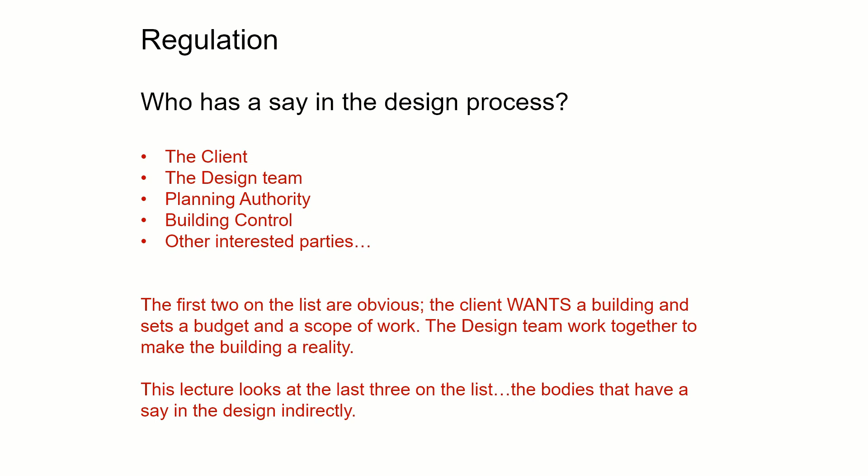So if we look first of all at planning permission, most people would have heard of planning permission, but it sometimes can be confusing to understand exactly what it is they are concerned with or what they have control over.

Most building projects in the UK go through a process of applying for and potentially or hopefully gaining planning permission. Planning permission can be thought of as a formal granting of permission to build by the local authority after they've considered a number of key factors.

First and foremost, they're going to look at what the building is used for. If you put an application in for a house, or a nightclub, or a pig farm, those types of buildings and those uses of buildings will be considered differently depending on where they are.

Planning are really looking for buildings to be fitted into certain categories to make sure that they don't become nuisance neighbours, that they're appropriate for the area to be developed in.

The planners have a number of tools at their disposal to check this. Buildings are classified by their use category, and buildings can be accepted or rejected based on whether that use category fits in with the land that the proposed development is going to be taking place on.

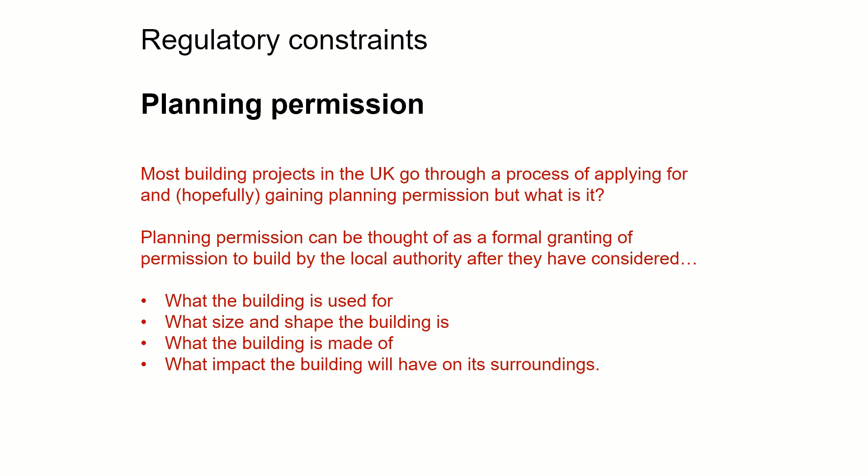The process of applying for planning usually requires you to have developed a design to a point where we can understand what it's going to be made of, how large it is, and its position within a site. So we would prepare a number of drawings, design statements, reports, and any other supporting documents required so that the planners could get a good idea of what the building is.

The local authority can then receive a planning application and they would consider it against their policies. They would look at it in terms of the design and the quality of the proposal, and they would also issue an invitation to neighbours and other interested parties surrounding the site to come and view and potentially comment on the proposals.

At the start of any planning application, there's usually a 3-week period where neighbours can fill out comments, what they call representations, to put their views forward. Usually these come up as objections, but they can be letters of support, very rarely.

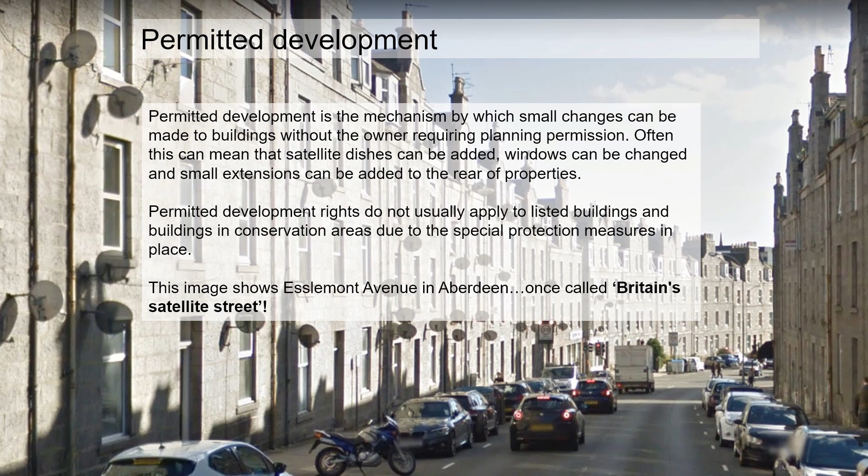It's really to stop the planners having to receive or deal with very, very small changes to buildings which aren't maybe seen as architecturally significant or historically significant. So things like adding satellite dishes, changing windows, small extensions to the rear of properties, changes to the roof, and repairs can usually be done to buildings that are not listed or in conservation areas without requiring planning permission. This is referred to as permitted development.

One of the additional characteristics that some buildings have is that they are listed, and you probably would have heard of listed buildings. These tend to be significant buildings which are judged to have special architectural or historic interest - special in inverted commas. It is debatable what is meant by special, but really they're looking for something which is of outstanding quality, or has uniqueness in some way, or has a historical interest.

That could be an attachment to a particular person, or an event, or a particular period in time. Listed buildings are preserved to help explain our culture and enrich our environment. They become part of our past, and they talk about a particular period of time, or events that happened.

Buildings are listed on a register maintained by Historic Environment Scotland, and you can view that register by going to their website. Buildings that are listed will be categorized into one of three subcategories - A, B, or C. These are effectively ways of listing buildings, but in reducing measures or reducing recognition of their importance.

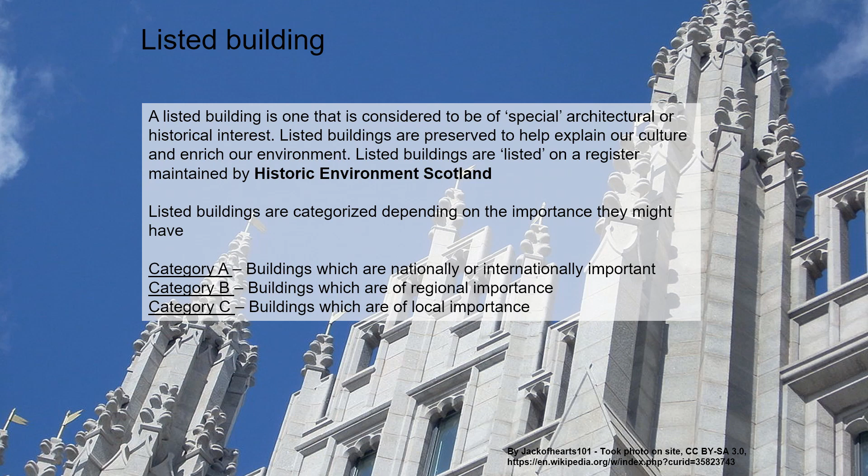There are over 600 conservation areas throughout Scotland. I think there are 8 in Aberdeen, and you can view the maps of conservation areas by usually going to that particular council and searching for maps. I'm not sure if there is a centralised database, but the councils definitely maintain these.

Conservation areas are crucial for the conservation of our environment. They allow an additional level of control so that changes can't easily be made to buildings, or can't be made under permitted development rights. The council may want to control things like changing windows, or changing fixtures and fittings to the front of buildings.

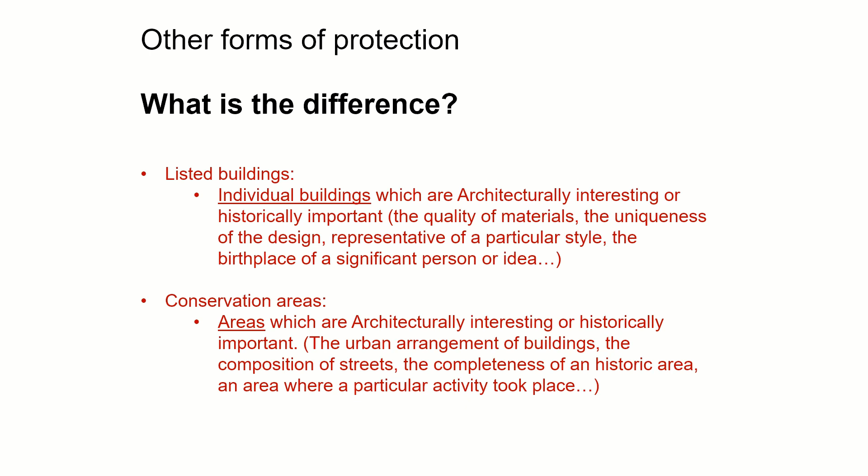So the planning system is really concerned with what a building is, what it looks like, what its function is, and how it would fit into its environment. It's not really a technical appraisal. In the UK and in Scotland, we consider technical appraisals separately from appearance and function.

Our technical system is building standards, sometimes referred to as building control or building warrant. Technically, the document that you get when you apply for and get granted permission to build is called the building warrant, and most councils would have a building control department that would deal with that. You would prepare a set of drawings, probably more technically in depth than planning drawings, but similar, covering a number of different aspects that the building standards officer would consider - looking at the structure of the building, whether it is safe, and whether it is protected from fire.

The design of the spaces within the building: have the designers considered accessibility, safety in stairs, access from one level within the building to another. They'd be looking for descriptions of the materials used within the construction of a wall to make sure that they are safe and certified by an appropriate body.

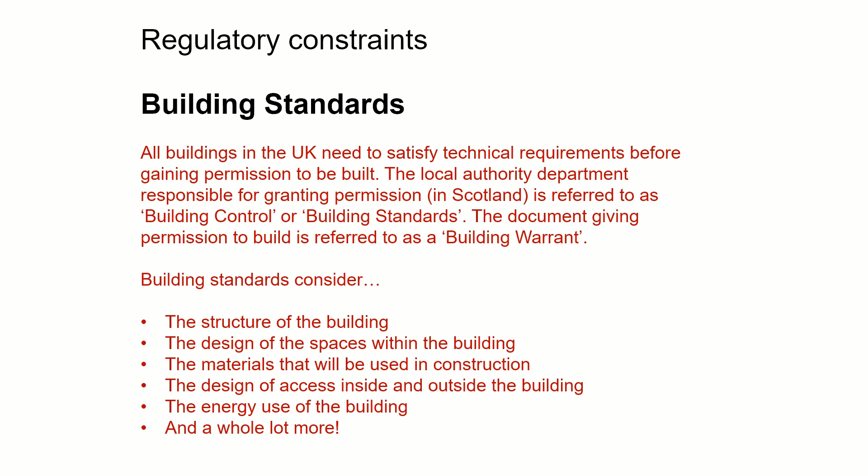So if we looked at an example of a plan that might be submitted for building warrant approval, we would probably start to split the information up into different levels. Rather than just having a plan that shows the arrangement of rooms, doors and windows, we would have a plan that might show an electrical layout, showing where smoke and heat detectors are located, where downlights and switches are located, and this would form part of the information they could deal with.

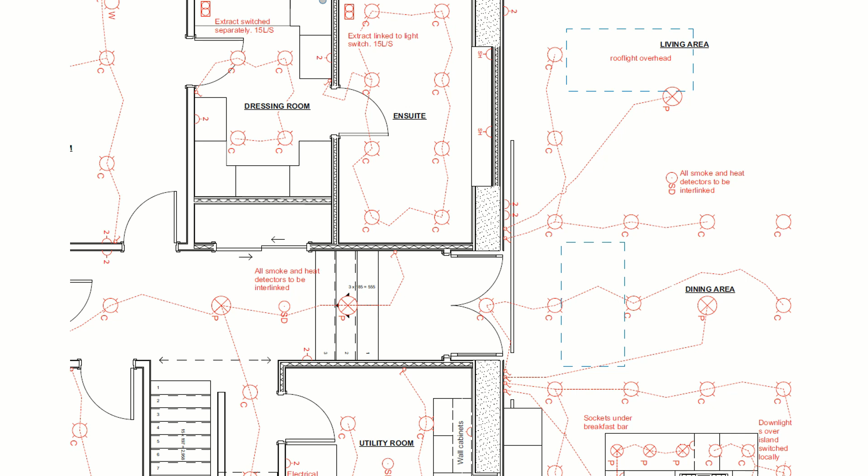Each different type of plan would have its own notes associated with it. For the general arrangement drawings, the ones that show the location of things, we would note things that maybe wouldn't be on planning drawings, such as widths marked on certain areas.

We would talk about the materials, add things like manoeuvring spaces for wheelchairs if they were included in a kitchen, and we would specify the rise and run of stairs, so that the amount of information on each drawing was relevant to its purpose.

Other drawings you might provide would be a drainage layout, a flooring material layout if possible, and we might also look at electrical layouts, as in the previous slide, possibly data, overhead structure, below ground drainage, all sorts of things.

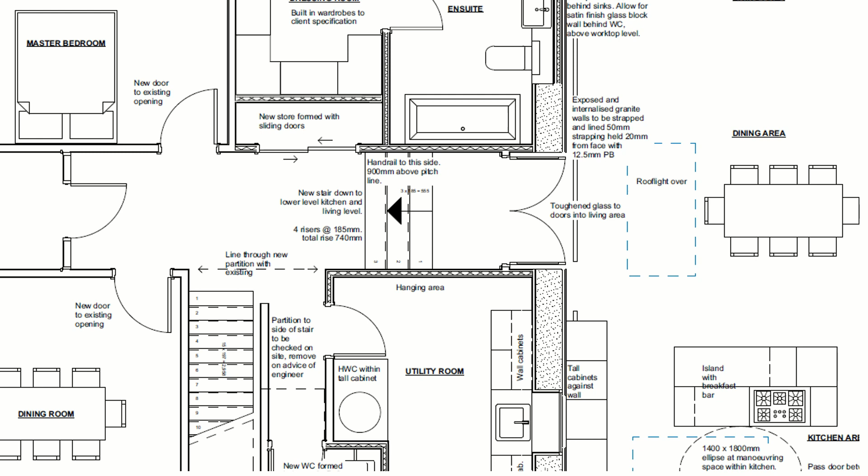Depending on the complexity of the building, the number of drawings has to increase to reflect that complexity. The building warrant drawings would attempt to give a complete picture of the build-up of a building, and all of the various systems, constructional, services, or structural, that are within it.

The process of applying for a building warrant is similar to planning. Building control is the department within the council, and they consider the design of buildings against a set document called the technical standards, which is a kind of reflection of the legal parameters, which are the building regulations. So the technical standards give practical guidance on how to implement the building regulations.

The technical standards are divided into two separate books - we say books because they're usually PDFs. There's a separate set of standards for domestic construction than there is for non-domestic construction. Domestic construction concerns itself usually with single houses, extensions, or blocks of flats.

Non-domestic would consider schools, heliports, hospitals, any other type of building you can possibly think of. And the standards are slightly different for things like fire protection, or warning systems for fire, or escape, because of the different types of activities within the buildings.

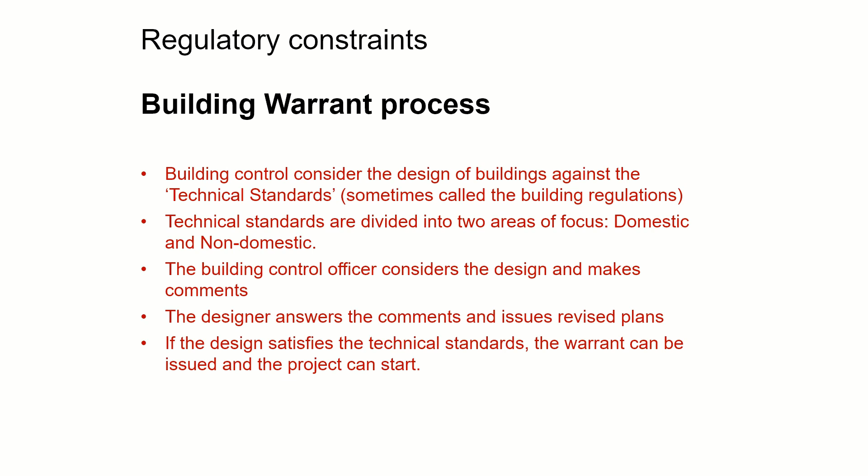So there are other forms of protection beyond planning and building warrant, and some projects, depending on where they are, or some sites, may have other forms of protection, or may need to be considered against other forms of certification. There are certifying bodies who issue certificates approving materials or components to make sure that they're fit for purpose.

There's also individual standards for some applications. So things like buildings from the Ministry of Defence would have their own standards, which would probably be more stringent than the building standards. There are separate standards for around railways and airports. So you have to not only consider what the base technical standards are, but also figure out if there's other information or other standards that you need to satisfy.

For protection of sites, there are some areas of land or water, or both, which represent our natural heritage, and these are sometimes protected as SSSIs, sites of special scientific interest. Recently, within the past 10 years, we had a situation in Scotland where a protected SSSI, a unique area of land which was sand dunes just north of Balmedie, was built upon to form a golf club. This sort of flies in the face of the protection that they were given, but the person building the golf club was influential and rich.

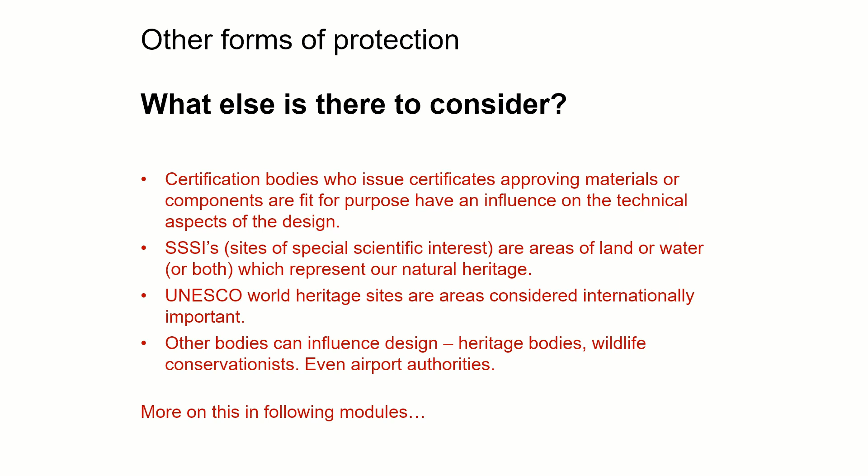So in conclusion, the process of designing a building is quite complex, and to be able to get a building started and completed, you need to satisfy a number of different bodies. The client is the first and foremost person you're dealing with. They commission the design, and the design team act on the client's instructions, so there's a number of different voices within the design team which have input. The local authority considers the design for planning, so that is what it looks like, where it is, and what it functions as.

We would then get technical input provided by third parties, so that could be certification bodies, material suppliers, other design team members or specialists, and the local authority would then consider the technical design for the issuing of a building warrant. In Scotland, you need to have planning in place and building warrant in place before you can build, and it is not legal to do so otherwise. In England, things are slightly different, but that's probably for you to find out.